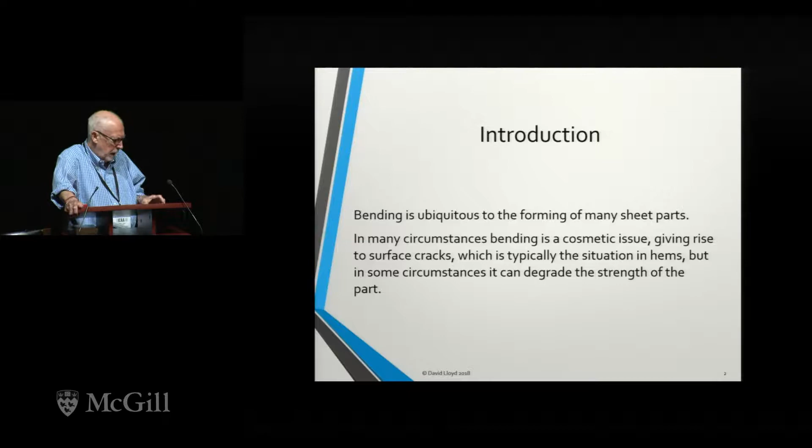So it's quite an important property that's sometimes underestimated, because you need to assess the performance in bending at quite an early stage in alloy development. There's nothing worse than spending a small fortune of time and money on an alloy development only to find out that at the end of the day, the combination of mechanical properties with bending just doesn't meet the requirements that you have. So it's something that really in alloy development you should look at very early on.

There are several different bend tests. I happen to like the cantilever beam bend test, but there are a whole range of them. They give slightly different answers, but in fact, if you compare them, they all scale the same. So whichever test you use, provided you do it correctly, there's no real issue.

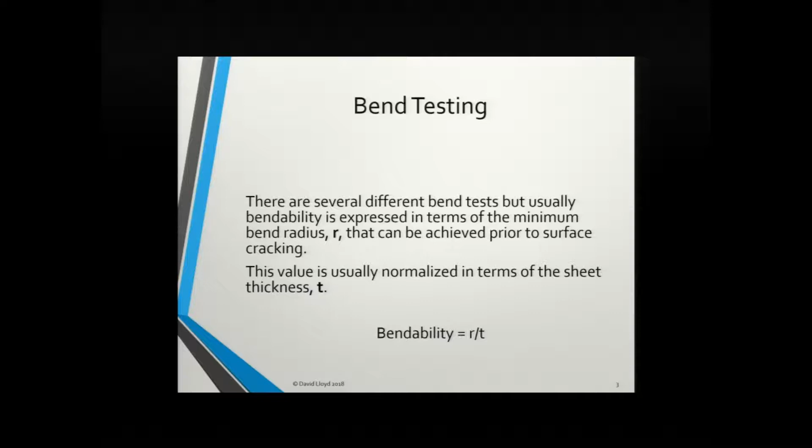And bendability is usually expressed in terms of R over T. I've said in this slide that the bend radius is normalized in terms of sheet thickness. It's not quite right, actually. It doesn't mean that if you measure equal values of R over T for a range of thicknesses, that you understand what's happening with different thicknesses of sheet. So normalization is not really the right term.

But we use R over T because, as you'll see later, it comes up in the equations of strain associated with bending. To understand bending, we need to consider really three issues—maybe more, but let's look at three anyway.

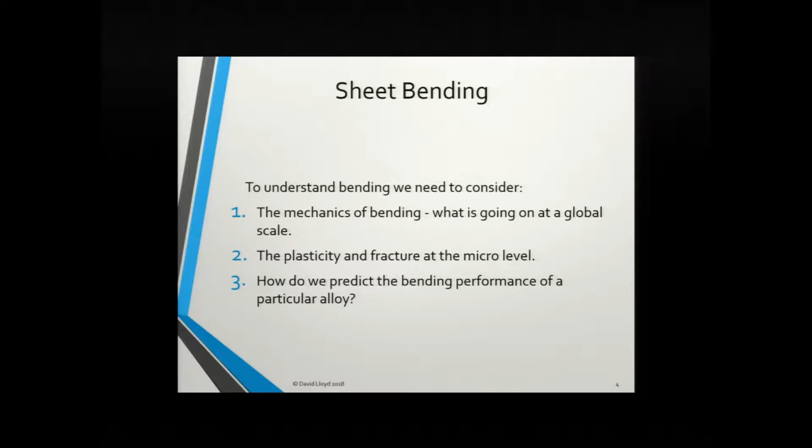There's the mechanics of bending—what's going on at a global scale in the bend test. Then there's the plasticity and fracture at the micro level. And then finally, we really would like to be able to predict what the bendability of any particular sheet is in a consistent fashion, so that one can compare alloys and materials.

The bending mechanics are really straightforward in principle. Essentially, if you bend the sheet, the outer surface, as you all know, is in tension. The inner surface of the bend is in compression. That means that somewhere in the thickness of the sheet, the strain goes from tension to compression, and there's actually a zero strain there, and that's the neutral axis.

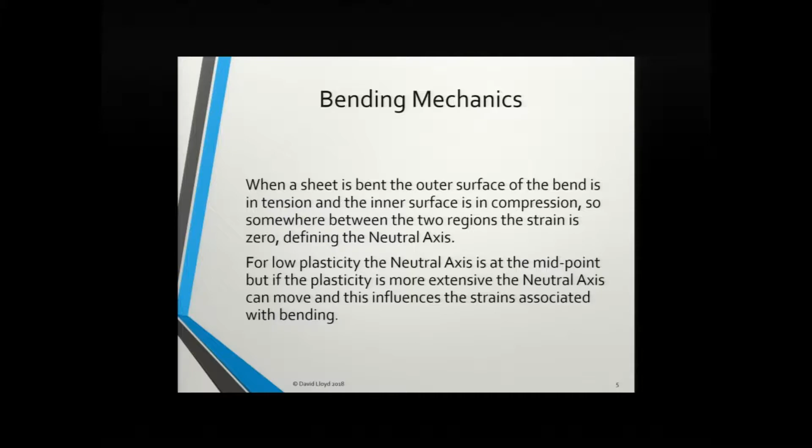For low plasticity alloys, the neutral axis is essentially at the midpoint. So if you're looking at really high-strength aluminum alloys, high-strength 7000s and 2000s, the neutral axis will sit round about the midpoint of the sheet. However, in automotive or transportation alloys, which is what I'm primarily going to talk about, there's a lot of plasticity, and as a result, the neutral axis moves.

And from many aspects, which I won't go into, we need to know where that neutral axis is and how it's moving. Now, the basic mechanics of bending were established in the 50s by Sachs and his group, and subsequent to that there were also various analyses. They're all fairly consistent.

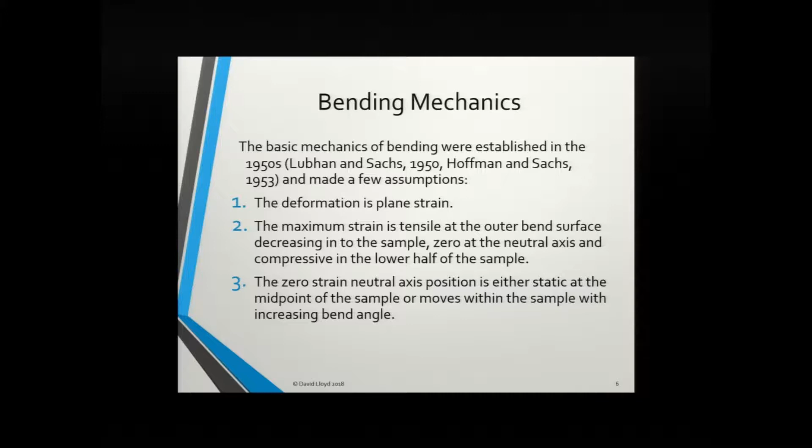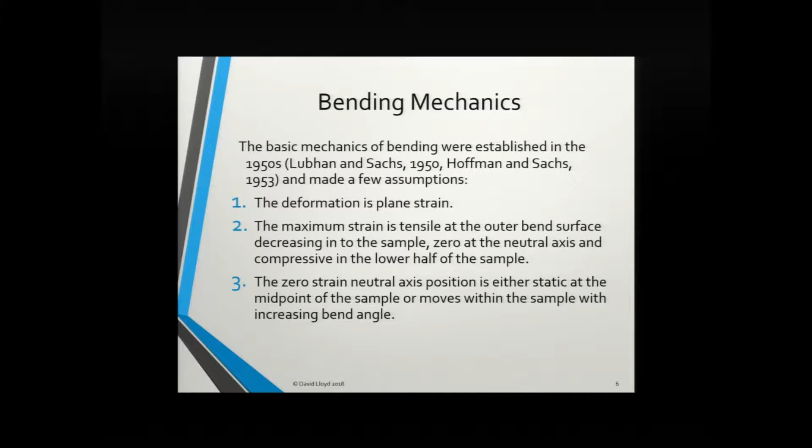The approach to the models that they used was to assume that deformation is in plane strain and bending of sheet. That's correct. They assume that the maximum strain is tensile on the outer surface, compression on the inner surface, and so we have a neutral axis, and the neutral axis can move or not depending on the alloy, as I said. So that's all pretty straightforward.

For a perfectly plastic sheet, which is what the mechanics models basically assume, the neutral axis radius is given by this equation. So it's a function of, as you'd expect, the radius of the bend and the thickness of the sheet.

For a moving neutral axis, the maximum strain is given by this equation. It's a tad more complicated, but essentially the parameters are the same.

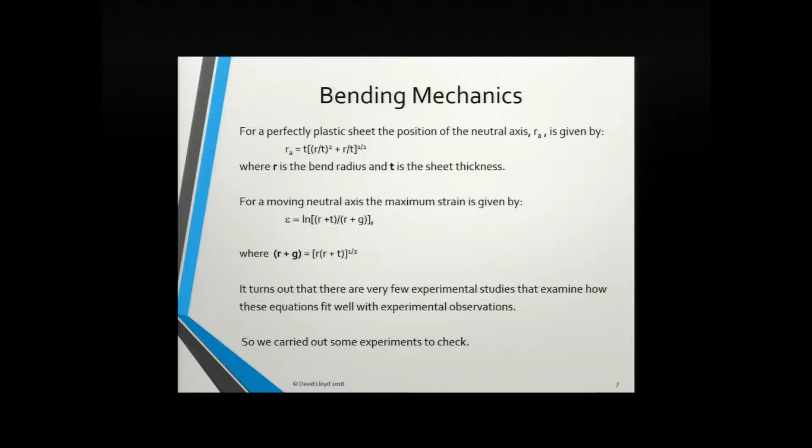It turns out, about 20 to 30 years ago when we started looking at this stuff, there were very few experiments that had actually looked at how well these equations performed, how close to experimental results they were. Since we were using these equations for a variety of things, I decided that we should actually check them out.

We found a paper by Brendan Parker in Australia at Monash about 20 years ago, where he'd used hardness measurements. He had shown that the neutral axis moved, but the technique had too low a resolution to be able to compare with experiments.

So we decided to do some experiments that would give us an idea of how these equations work. We've done experiments on a whole variety of alloys, but I'm just going to talk about experiments on 1 millimeter sheet of 6111.

It's in the T4 temper, and it was water quench sheet. The sheet was then electropolished, and we examined either the through thickness plane or the upper bend surface.

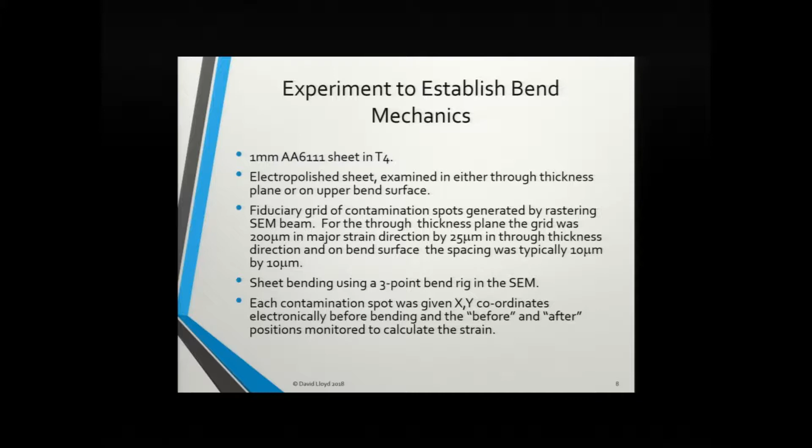What we did was lay down a grid of carbon contamination spots. We did it in the SEM by rastering the grid along and basically letting it dwell at various points, which gave us a grid of carbon contamination spots.

For the basic mechanics equations, we used a grid that was 200 microns in the major strain direction and 25 microns in the through thickness direction.

But for looking at the upper bend surface, which I was also interested in, in terms of the plasticity and damage there, we looked at a grid that was 10 by 10 or even 5 by 10.

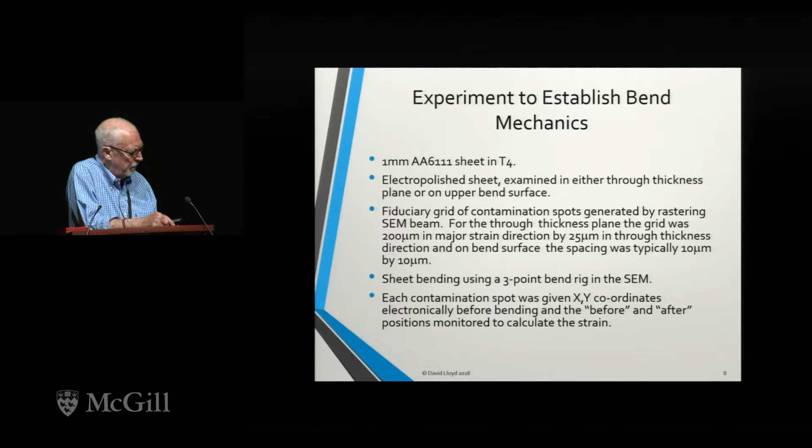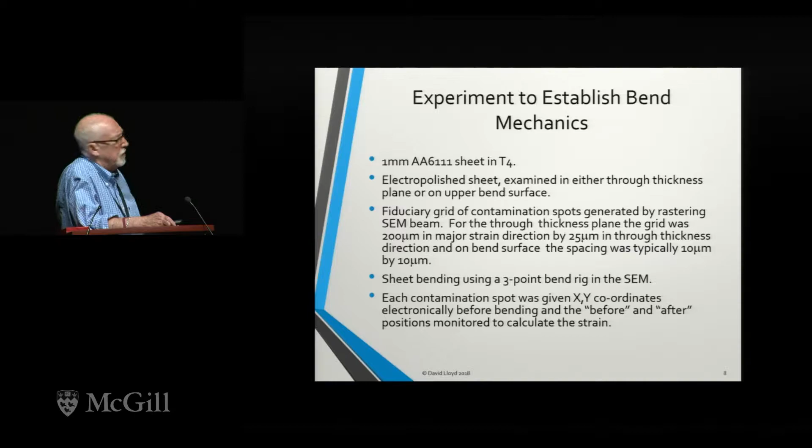The sheet bending was done inside the SEM, using an automated 3-point bending rig. Each contamination spot was electronically given XY coordinates, so that allows us to know where the spots were before and after bending, and we could back out the strain.

This is the bending rig, inside the microscope. This is the bend sample. We can bend it in a controlled fashion, and we used a camera shooting through a port on the SEM rig. We could measure the bend angle and photograph the macroscopic bend sample, so we could back out the radius of the bend and so on.

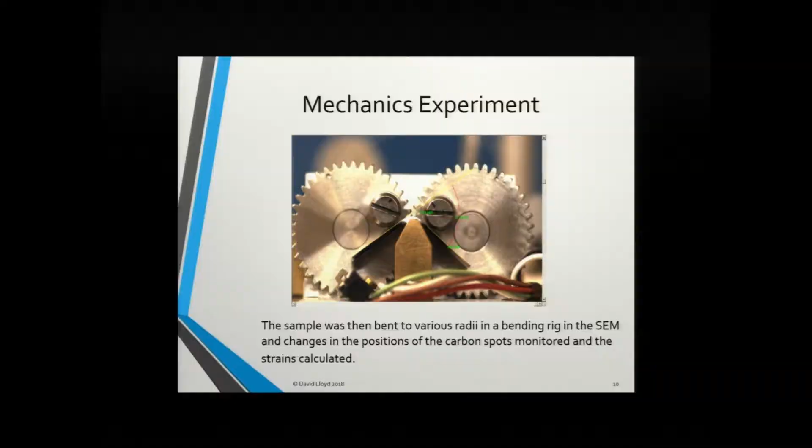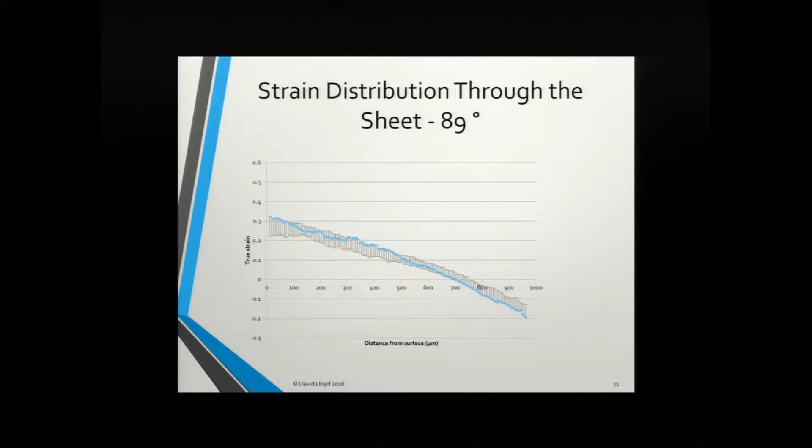This distance gives you the position of the neutral axis from the surface.

These are the upper and lower limits of the strain measurements that were made. These are not multiple samples, it's a single sample. What we're basically doing is concentrating around the apex of the bend and moving either side of that to get the range of strains. You can see the scatter is on the order of a strain of about 0.1 when you're close to the surface, and it tends to generally decrease as you go through into the bulk of the sample.

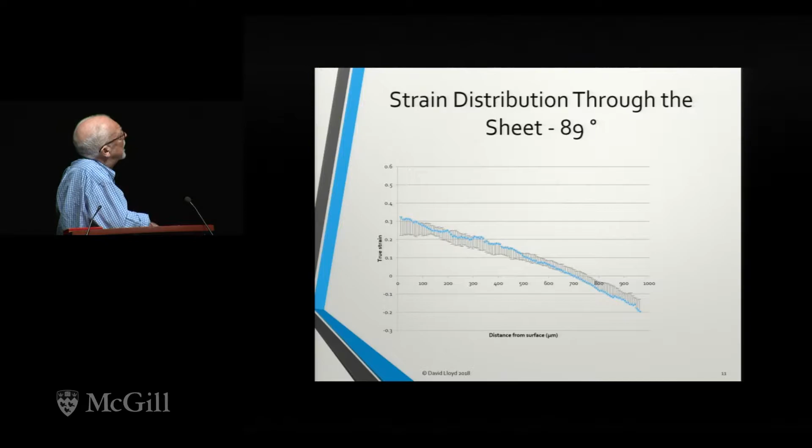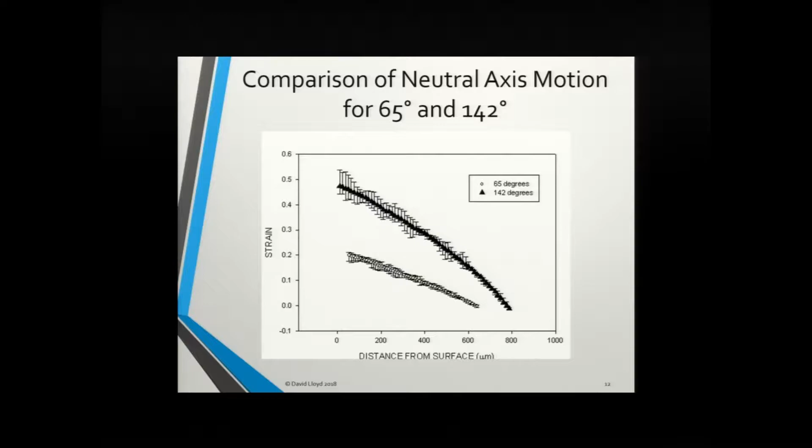So the neutral axis is moving, and from comparison of a large amount of different tests and data, the movement is pretty consistent. That's a comforting thing.

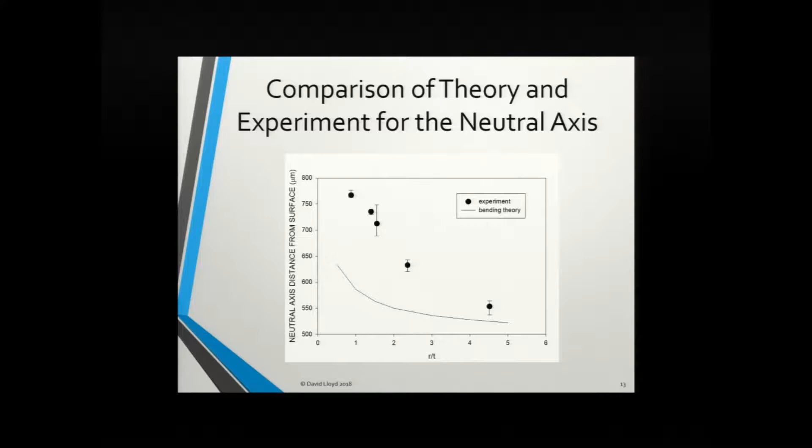So we can compare this movement with what the theory tells you, and that's what's done here. This is what the theory tells you, and these are the measurements we got. The theory underestimates quite significantly the level of neutral axis motion.

That's pretty well consistent with the 6000 series alloys we've looked at: 6016, 6010, 6111. They all show this fairly large difference between what the theory is telling you and what the actual degree of bending is telling you.

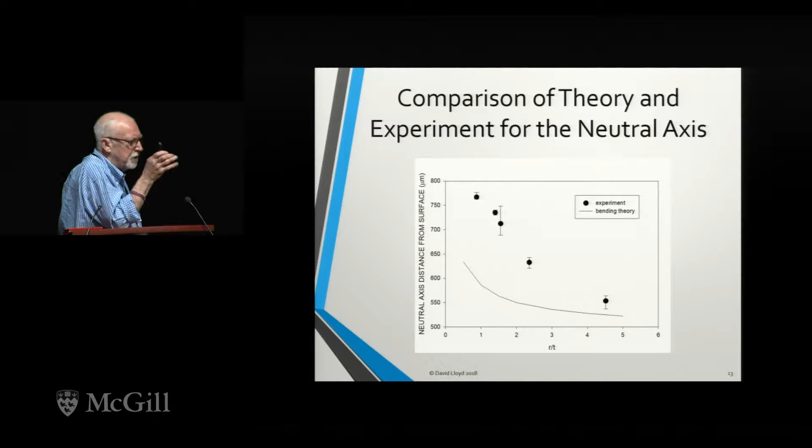This is not surprising when you look at how the analysis was done. I'm not going to go into how the basic mechanics analysis was done, but it's a fairly consistent trend that you get. So if you're interested in modeling issues through the thickness of this material, it's rather useful to know where this neutral axis is, depending on the radius of the bend you make.

And it's not a trivial amount of error or difference.

The other thing we want to know is what is the maximum strain at the surface of the sample, and how does that compare with theory? For that, we measured the maximum strain 10 microns below the surface, and this is what that data tells you.

Again, the theory is a bit off from the experimental data. The experimental data tends to be above the theory, but the difference is probably pretty minor. I normally don't worry about that difference, so we've been quite comfortable using the theoretical mechanics equation for estimating the surface strains. But you can see that the theory does underestimate what the surface strain is.

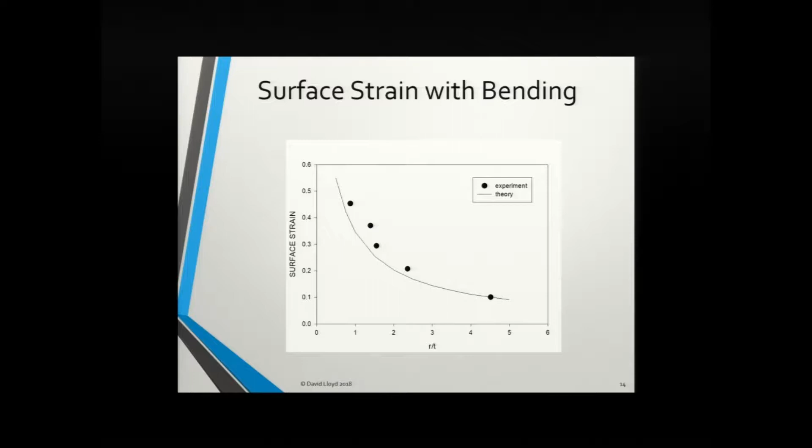You can see that in this particular case, we're looking at a surface strain, that's a global macroscopic surface strain of about 0.45, that sort of order, in this particular case.

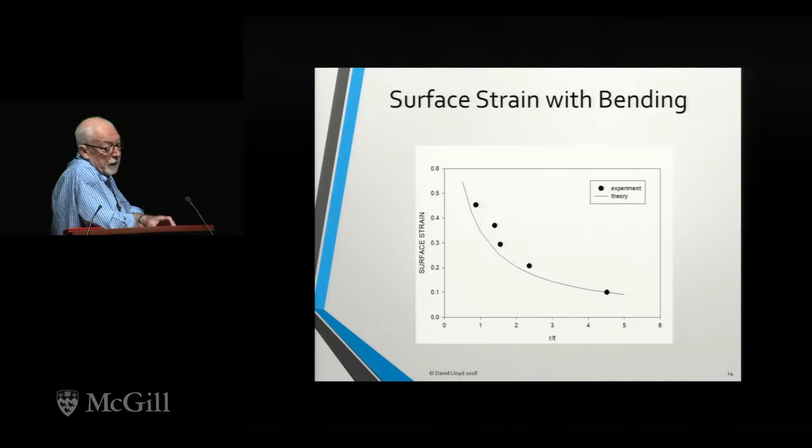So what conclusions can we make from the bending mechanics then? The motion of the neutral axis is significantly underestimated by the theory, and that's important under certain circumstances. For what we're talking about today, it isn't, but it's important to bear this in mind if you want to compare damage models and so on.

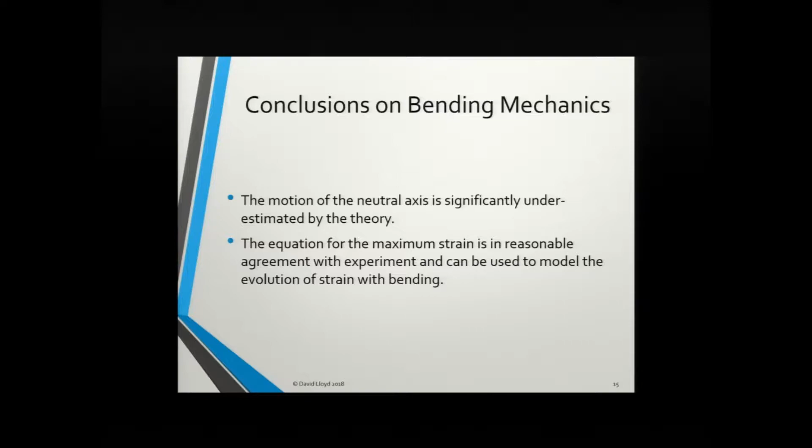And it's important if you're looking at graded structures. In other words, if you're looking at variation in grain size through the thickness, or a variation in particle content through the thickness, or sandwich panels, it's important to appreciate where that neutral axis is and where it's going as you're bending it.

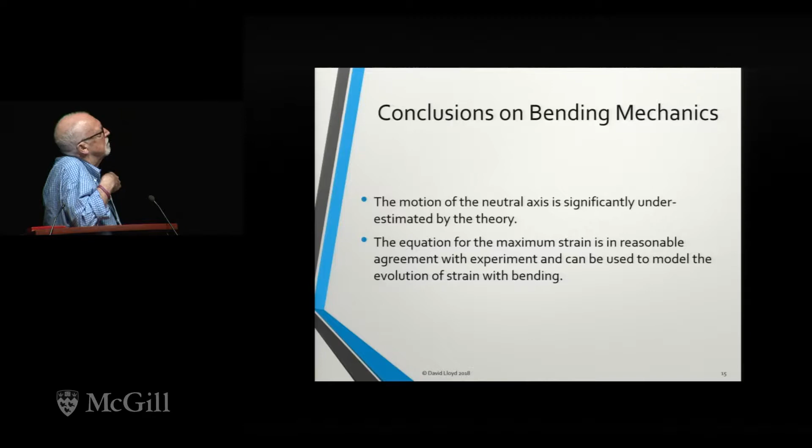Because the damage essentially is progressing quite significantly deeper and deeper into the sample. The equation for maximum strain, I think, is in reasonable agreement with the experiments and the variations of results that you get, so I think that's okay.

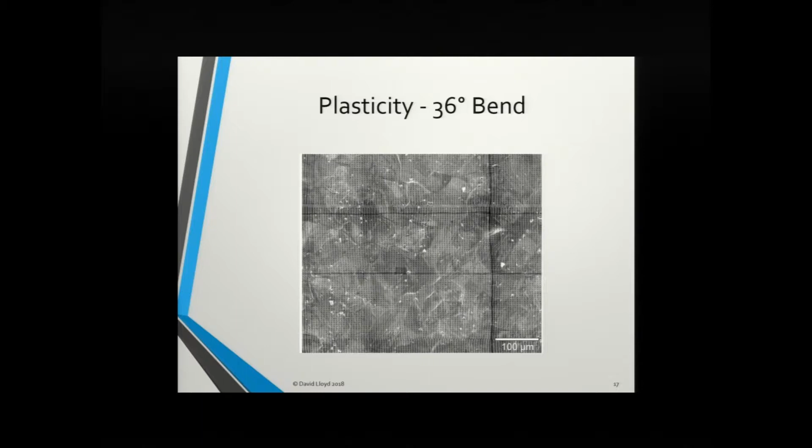Remember now, we've got an upper bend surface. Essentially, the grains of the surface are totally unconstrained, and they displace. It's not an insignificant displacement, and I'll show you in a minute.

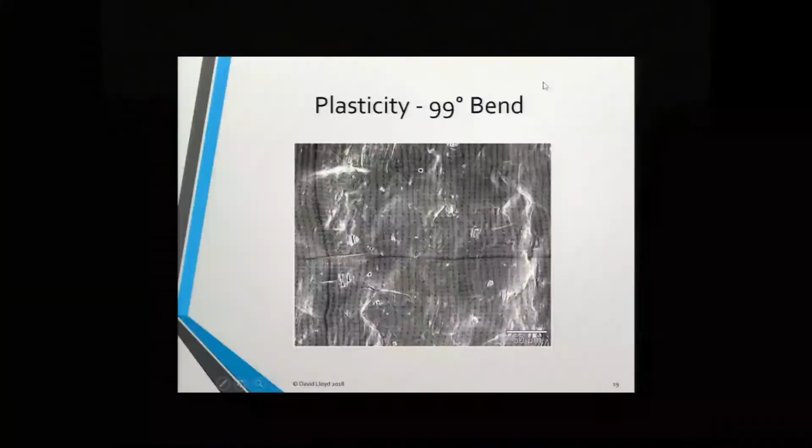And we know that the susceptibility to plasticity localization is higher in the plane strain condition. This shows the 99-degree, same bend angle, but a rather higher magnification. And here's our grain boundaries with a displacement.

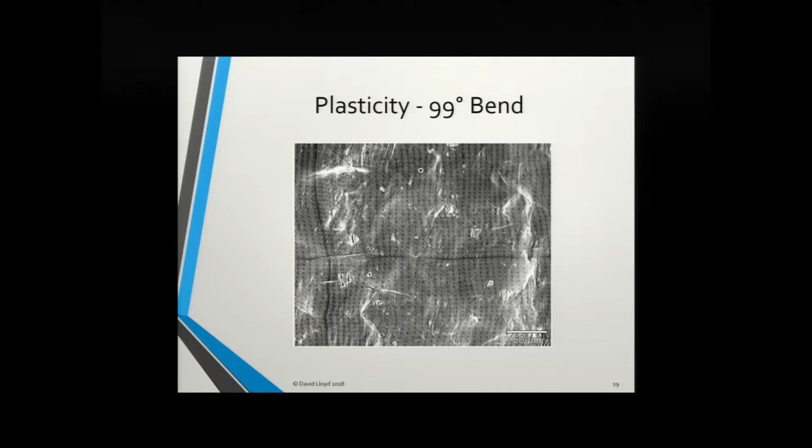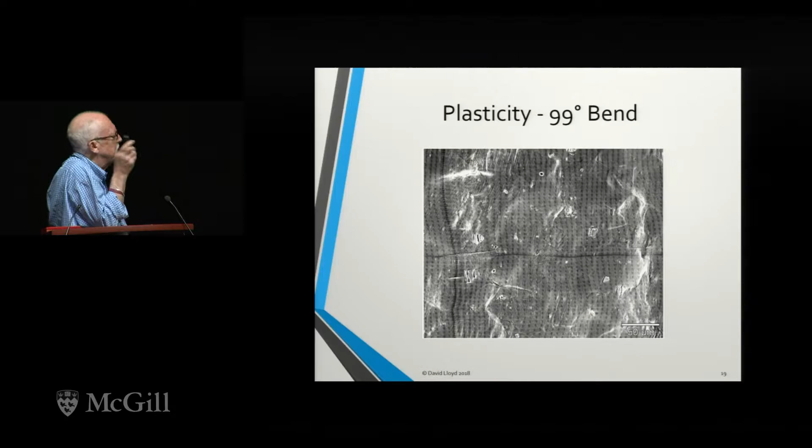And these are intermetallic particles on the surface that at this bend angle have cracked. Now, the interesting thing about this technique is that you can monitor the development of strain around those intermetallic particles as the bending continues and as the damage continues. So it's quite useful, there's a lot of information here which I'm not going to go into, but it is quite interesting to look at how the local strains evolve around constituent particles, how important the size of the particle is, and also the shape.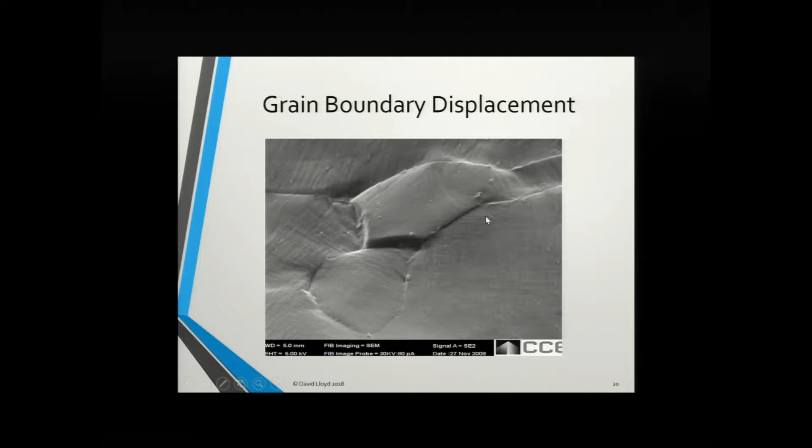Experiments like this are really quite interesting, and maybe if you do them, you'll find some things that might surprise you a bit. This is a FIB image, again at a 55-degree angle, and oh boy, a pointer has suddenly come back. How do we do that?

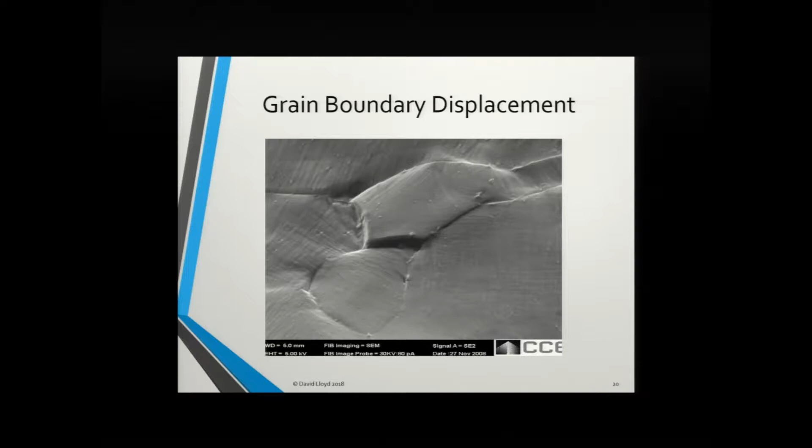This is a displacement at the grain boundaries, and you can see the slip lines going on inside the grains. Some of these displacements are really quite sharp, and if you look at them at higher magnifications along this displaced surface, you'll actually see evidence of slip lines there as well. So as this grain is doing that, general plasticity is also occurring in the grains.

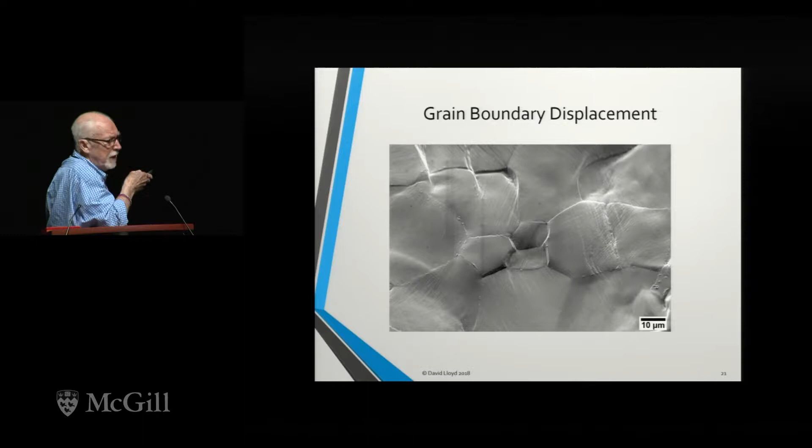Oh, this is another FIB image at a different mag, and here is this grain boundary displacement. This is really significant displacement.

Now, you do see it in tensile samples, and Tony Rollett has done some work on this in tensile samples. We saw it first in significant amount when Mukesh Jain and I were doing hydraulic bulge tests, and we saw these displacements. It's all a result of the fact that these grains are unconstrained, and the strains involved in bending locally can be really quite high.

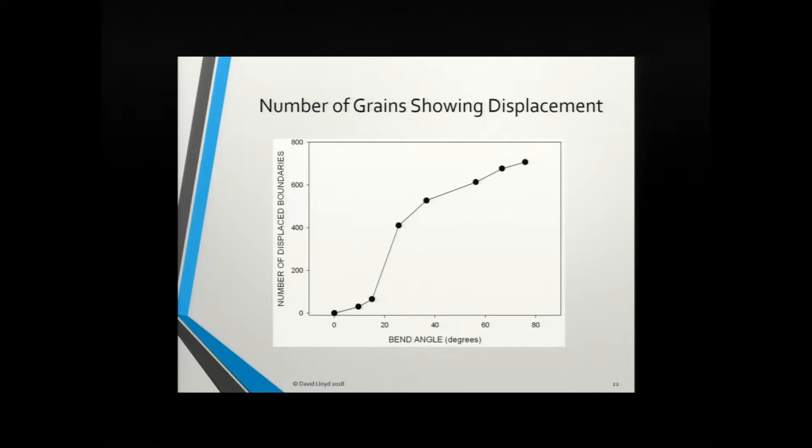The number of grains showing displacement with bend angle follows this trend, and you can see that the displacement starts from really pretty low bend angles, then increases very significantly, and then levels off. The number of grains increase, but also the displacement at the boundaries, on the individual boundaries, increases fairly drastically.

Obviously a deformation, not too surprising, it is incredibly inhomogeneous. As you continue the bending, the local strains on the boundaries and within some of the grain features, the slip lines inside the grain, increase. But the strain also spreads along the boundaries. So the number of boundaries showing displacement increases as you continue bending, the strain locally associated with the boundaries increases, and it spreads significantly along the grain boundary.

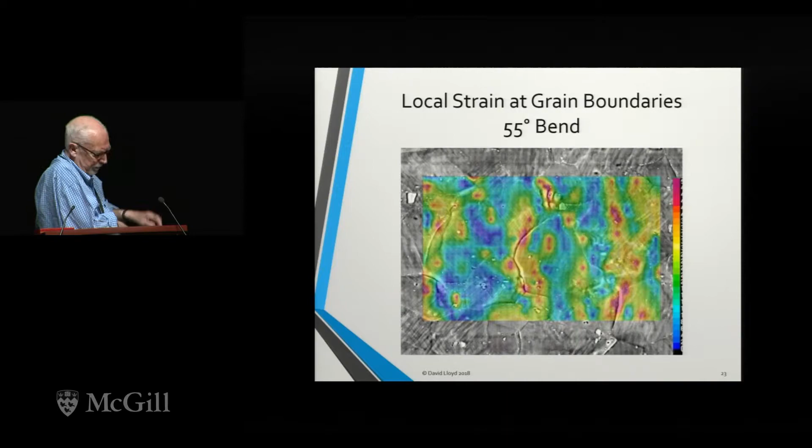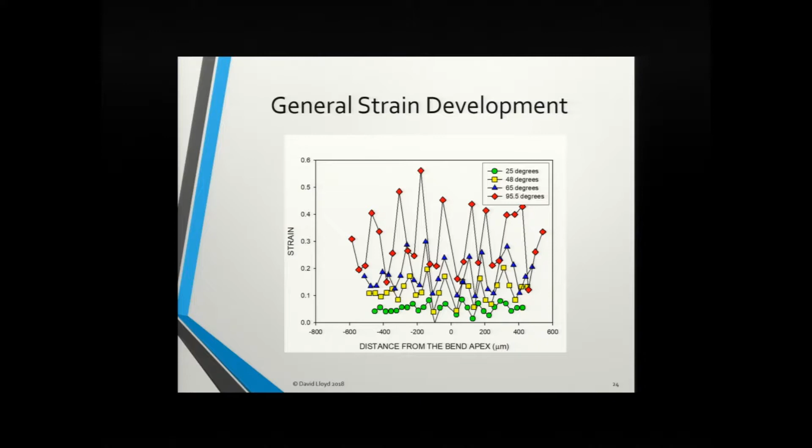This is looking at the distribution now at a range of bend angles, covering exactly the same region in the sample. Here's the sample, with measurements made at a bend angle of 25 degrees, which is very, very low, then going up to 48 degrees, up to 65 degrees, and so on, eventually up to 95 degrees. Now, this sample is not broken, nowhere near broken, but you can see that the strains are already getting pretty high locally.

In fact, they'll actually get up here on this sort of scale, up to 0.7 or so, typically. The other thing that strikes you is that localization actually starts fairly early on. Here's an example where we've got this region where there's a localized strain, and then essentially it grows and grows.

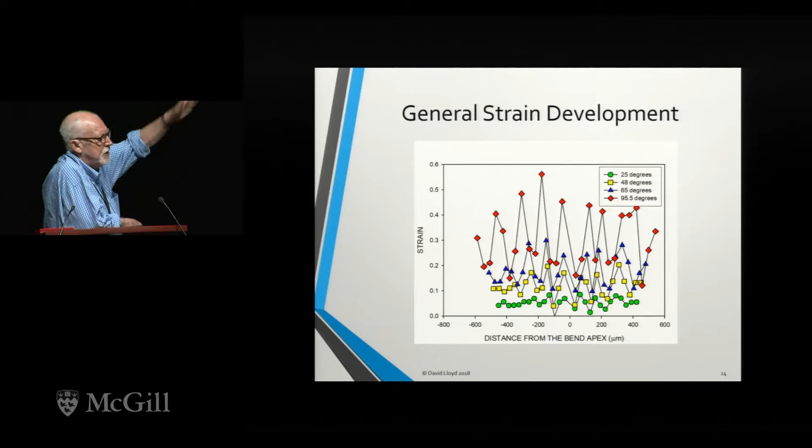It goes up to there, and then when you continue bending, it goes even higher. So localization starts very early on. And this is not differentiating whether I'm at a boundary or anywhere else, really. We're looking across a region of about 600 microns either side of the bend apex, which is at the 0 point.

So the deformation localizes early and concentrates early. Once you've developed a high local strain area, that will continue to evolve through the subsequent bending process and will carry on. Eventually, the damage will link up: boundaries, intermetallic particle voiding, cracking, and you'll develop these fractures on the surface of the sample, and you're dead.

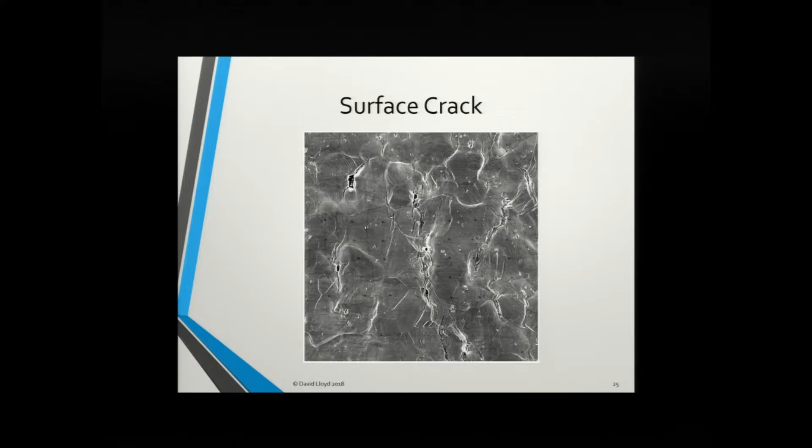You can look at the damage process with this technique using the grid carbon spots and grid. You can see how this damage links and how it connects up to give you final failure.

So the general comments then, just to recap: the strain is very inhomogeneous, not surprising, localizing, begins at relatively low bend angles, and the surface displacement at grain boundaries also comes in at relatively low bend angles. The number of grains showing the boundary displacement increases with bending, as does the extent of the displacement at any particular boundary. Other damage mechanisms occur at higher bend angles.

You'll get localization in surface shear bands. That's a function of the alloy and a bunch of things. Cracking of intermetallics, voiding, and the usual fracture processes that we're all familiar with. And eventually it all links up, and that's that.

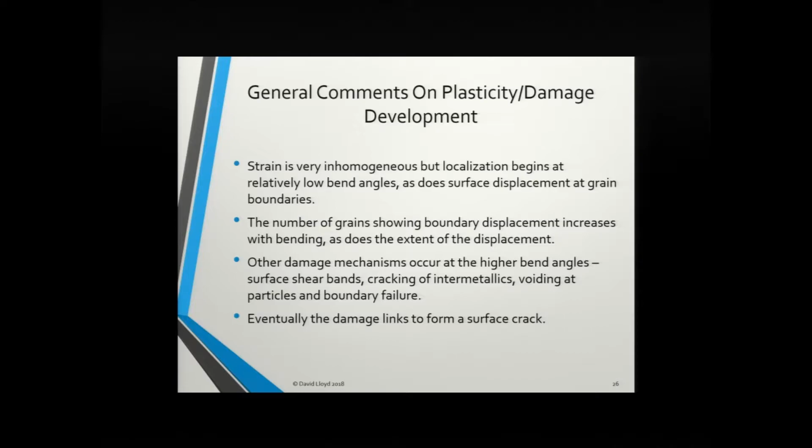Okay, so we've now looked at the mechanics, so we now know what sort of strains we are looking at, where those strains are, and we can relate that back to the microstructure of the alloy. We would like to be able to predict bendability.

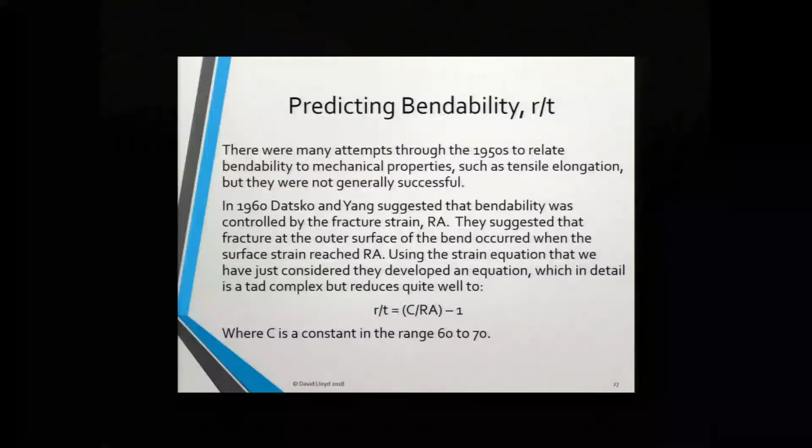There were a lot of attempts through the 50s and whatever to predict bendability, but Datsko and Yang in 1960 suggested that bendability was controlled by the fracture strain of the material, and once the strain at the bend surface reached that fracture strain, you get cracking, and that would allow you then to develop an equation to predict it.

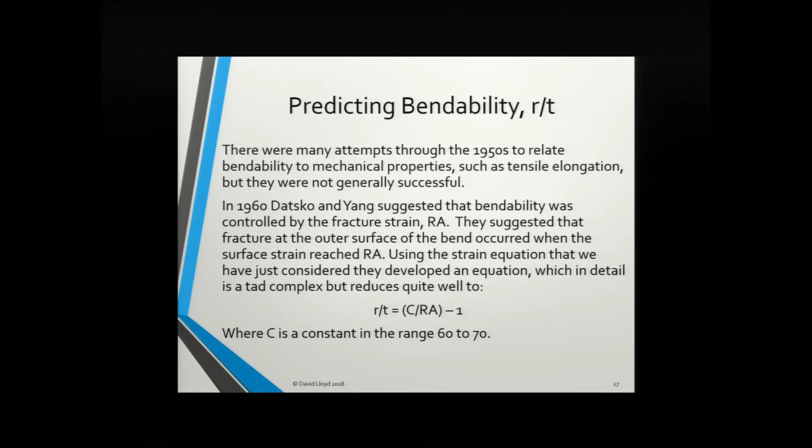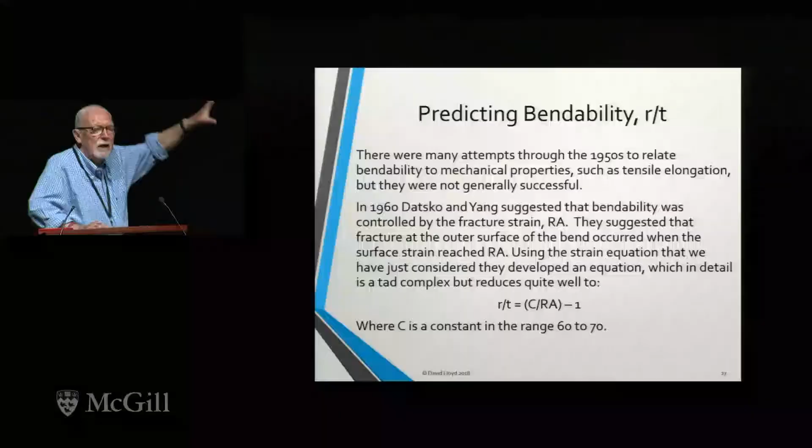They used the Sachs equation in their paper, which if you can get hold of, looks at a static neutral axis and a moving neutral axis, and the form of the equation for both is exactly the same. It's of this sort of form, which is really very simple. In fact, if you actually look at the paper, the analysis is a tad more complicated than that, but that empirical equation actually is really very close to the theoretical expression that they developed.

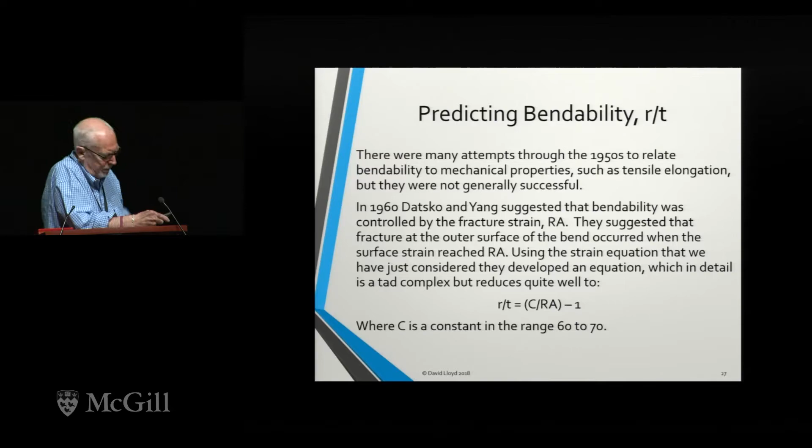So there's this very simple equation. This is the bend radius that you can get where cracking occurs. This is the thickness, this is the fracture strain, and this is a constant. And that constant for a moving neutral axis is in the range 60 to 70, at least in the aluminum alloys that we've looked at. So it's 60 to 70.

If you don't have a moving axis, this equation still applies, but C is now down—they suggested 50. The experiments that we've done on high strength 2000 series alloys suggest that it's closer to 40. But anyway...

That equation can be used, and we've shown a variety of data plots of this in the literature over the years. Strictly, the fracture strain should be measured in plane strain, of course, because that's our deformation mode. But Embury and the group down there, and also Lewandowski and others, have shown that for aluminum alloys of the types we're looking at, the path dependence of the fracture strain is relatively small when you move from measuring it at the tensile path as against the plane strain path.

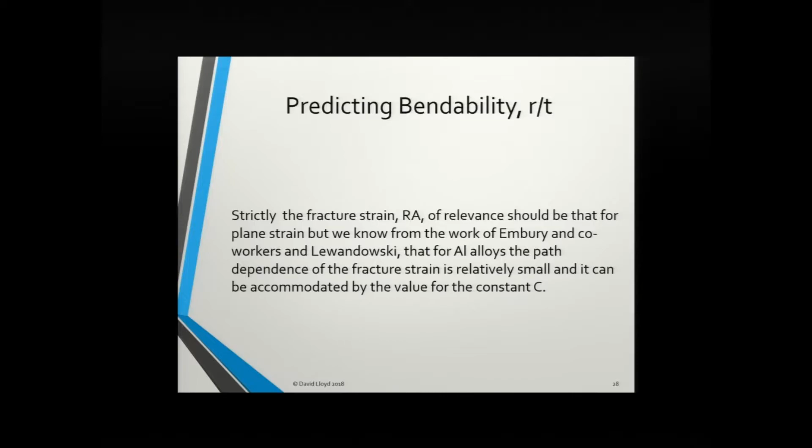Remember, we're looking at fracture. We're not looking at the normal FLD minimum behavior that you see at the plane strain position. In fact, the minimum fracture strain is actually at the biaxial position, right? Anyway, there isn't much difference. You can, and we have, measured the fracture strain in plane strain, which is a tedious exercise, but you can do it. And you'll find that the difference is within 3 or 4%. So with the scatter you've got in a normal experiment, I forget about that.

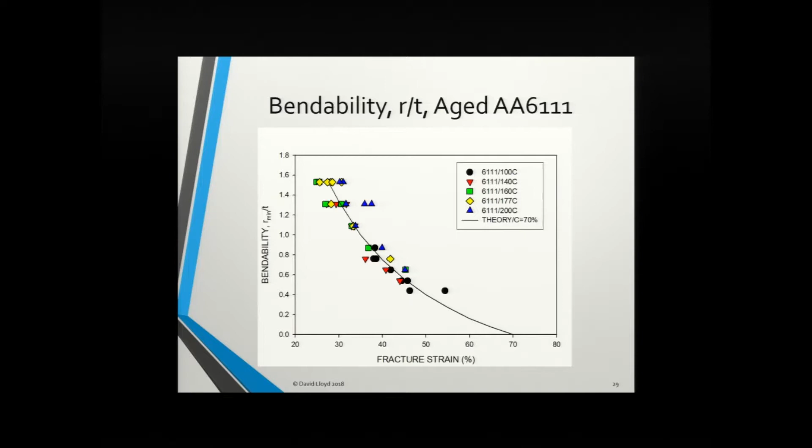And we find for 6111, 6016, and alloys around that thing, process as we do it, 70 is what works for us. So that's the value that we use.

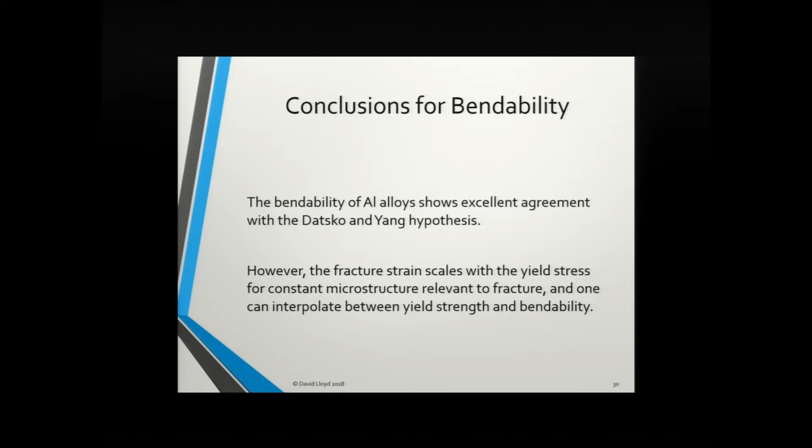So the conclusions for bendability are the bendability of aluminum alloys, and it's not just sixes, incidentally. We haven't looked at an aluminum alloy that hasn't given agreement with that expression. And it's reasonable, right? Essentially, if you achieve a strain at the bend surface that's equivalent to the fracture strain, the material's going to fail. That's the way it is.

And we now know from the equations that we showed and the data we showed previously, if you have a profile and you know what the radius of that profile is, and if you know what the fracture strain of the alloy is, you know whether that sheet is going to meet those bending requirements or not. It's really pretty straightforward, really.

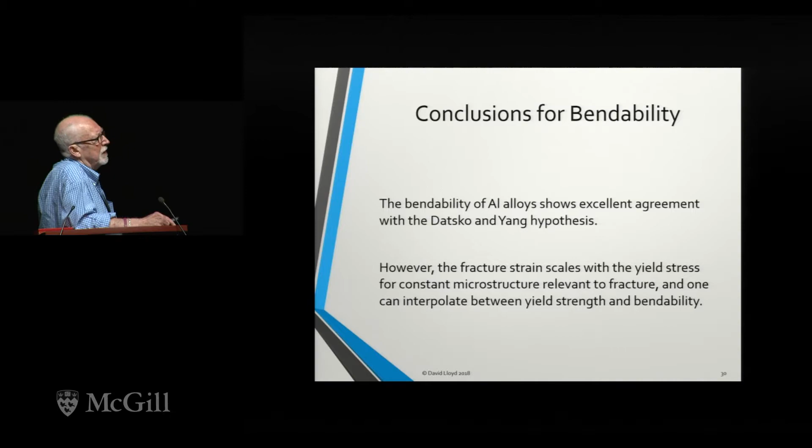Now, in addition to that, the fracture strain scales with the yield stress of the material for a constant microstructure relevant to the fracture process. And by that I mean it's not the general microstructure, it's what bits of that microstructure are relevant to the fracture process. And if you change the strength while keeping those parameters in the microstructure constant, the fracture strain will scale with that.

And that's rather useful, because that means then that you can, in doing alloy development and looking at different alloys, if you know what that scaling is, then you don't have to keep doing bend tests or whatever. You can just interpolate between what the yield stress is doing with a particular treatment or alloy and essentially estimate quite well what the bendability is going to do.

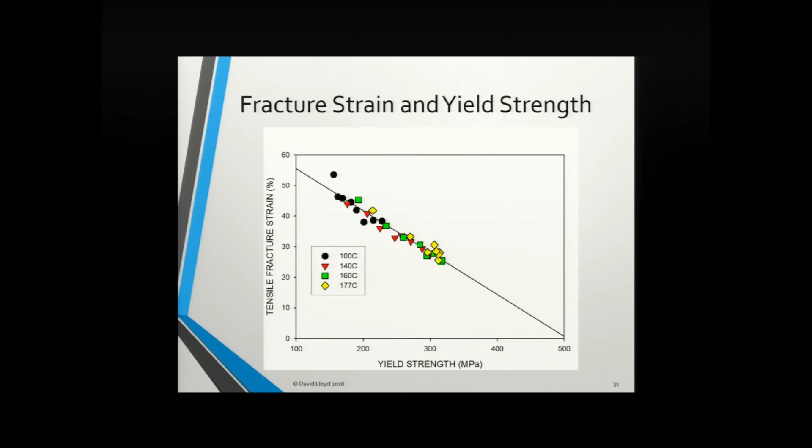That data point there, it's not an outlier, it's for very short aging times at 100 degrees C. And it's in a transition point between artificially aged, and this is very lightly artificially aged, and naturally aged material. And the scaling line for naturally aged material is different to that for aged material. I'm not going to go into this, whatever, but that's the way it is. So that data point is actually correct, but there'd be another line coming down here that was a natural aging. If we had natural aging data, it would track on a different scaling line.

Okay, so we've covered the mechanics of bending, the nature of the plasticity, and how to predict bendability. And I think we can do that all fairly well in a self-consistent fashion. The plasticity associated with grain boundaries is more apparent on a bending surface than it is generally, and the strains locally at grain boundaries can be very, very high. And that's a result of the unconstrained deformation of the surface.

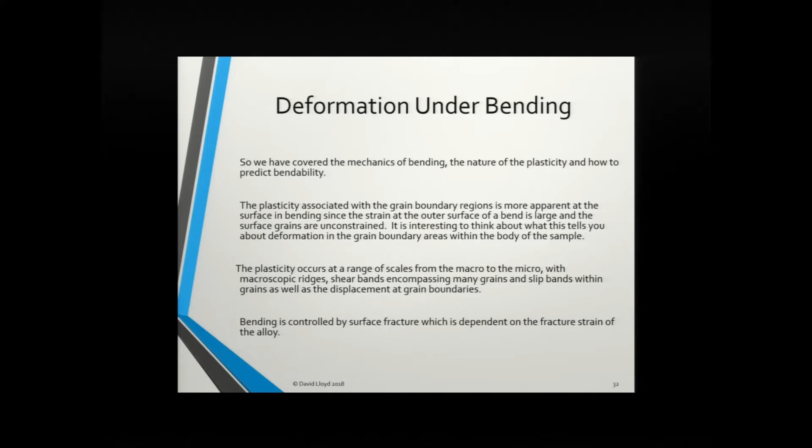It's interesting to think about essentially what does that displacement and strain associated with it tell you about what's happening to the deformation in the grain boundary area within the body of the sample. And you might want to think about that a bit.

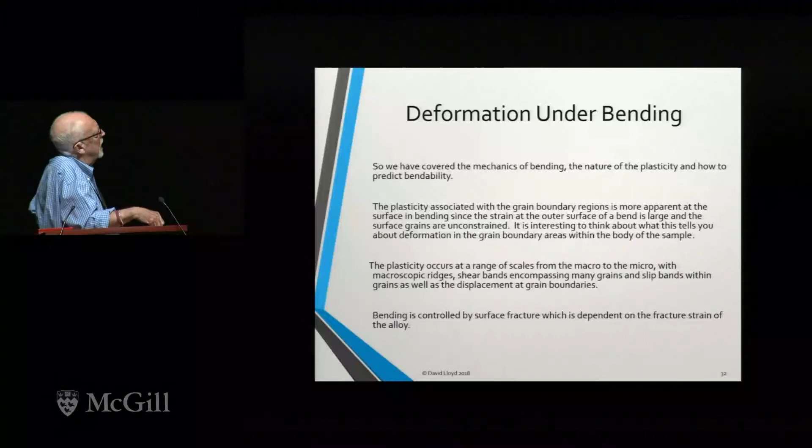Plasticity occurs at a range of scales from macro to micro, as you'd expect, and you generate. There's a whole range of topography issues that I haven't even touched here, which is associated on a large scale on the bend surface. You'll see ridges and so on. But they don't appear to significantly affect anything that I've spoken about. They're interesting, and they could have a cosmetic effect in certain circumstances, if you do something stupid like having a huge grain size in the alloy.

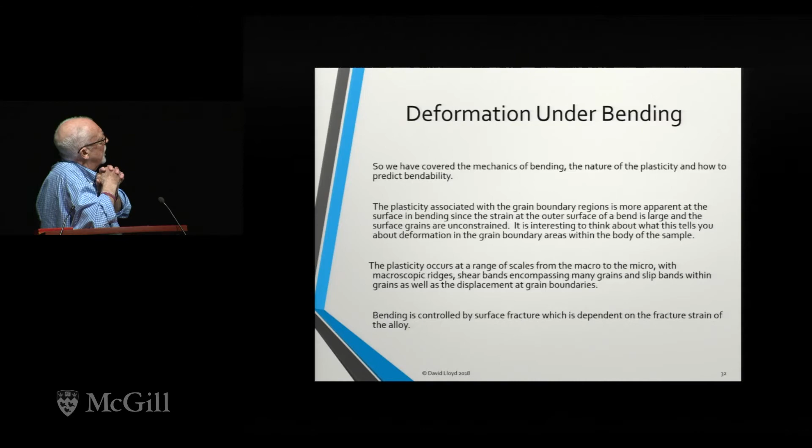Bending is controlled by surface fracture, and that's dependent essentially on the fracture strain of the alloy. So if you know what the R over T of the particular profile that you've got, you can then back out from that what the strain associated with that surface is.

If you know what the fracture strain of the alloy is, and you have plots as we've shown, you can immediately say whether that alloy is going to meet that bending profile or not. Now, there are issues in terms of sometimes we don't just bend a sample right off the bat—it goes through strain paths and so on, and that's another talk. But essentially, for an initial assessment of how the alloy is going to do, I think if you use these sorts of approaches, you can estimate very well how the alloy is going to perform in a bending test.

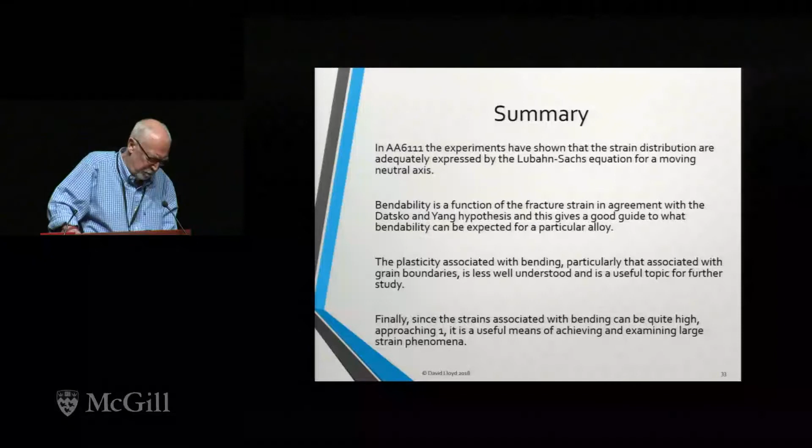The equations are particularly useful in terms of neutral axis issues, movement of that in graded microstructures—some of the things Nick was talking about, which come up in a couple of other papers at this conference. The neutral axis's motion can have significant influence on the overall bend behavior of the alloy, and it's useful to know what it's actually doing.

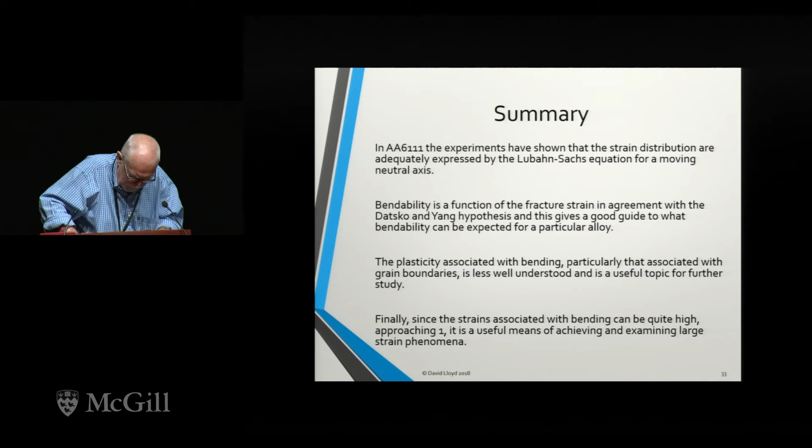Anyway, that essentially is as much as I'm going to take of your time. I'd like to thank Mark Gartno and the Serco guys for helping me with some of this stuff, and the numerous students that have toiled through making these strain measurements—it looks pretty simple when you see it in a graph, but when you actually go through it, it's a hell of a lot of work. We've had, over the years, students from Waterloo, UBC, and McMaster, not all metallurgy students either, who've done a super job generating a huge amount of data. So thank you for listening, I appreciate it.

Just one or two, okay. Not that I know anymore. David is willing to answer a few questions if there are any in the audience. Christoph, yes? Oh, if I'm mobile, maybe, yeah. No.

Thank you, that was good, yeah. Oh, Warren, sorry, Warren. Oh, sorry, David, thank you for the talk. Have you looked at different quench rates and PFZs and how they affect surface displacement?

We've looked at different quench rates, and as you'd expect, quenching fast is always good. But no, we haven't looked at PFZs and so on. You know, the bend test is really informative in terms of if you have the microstructural tools associated that we now have to look at these bend samples.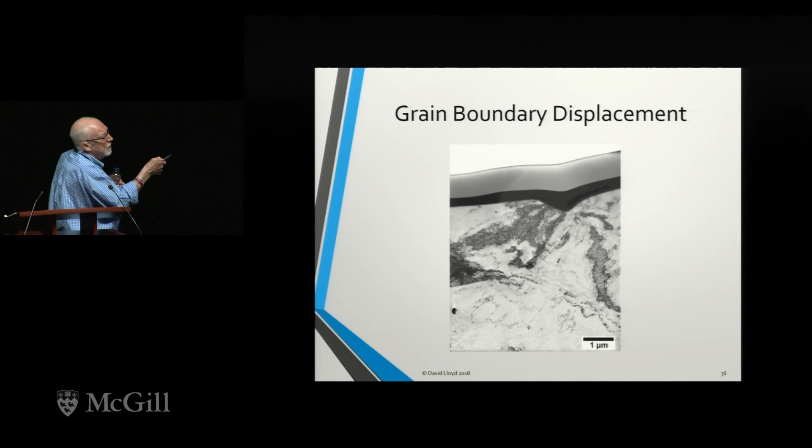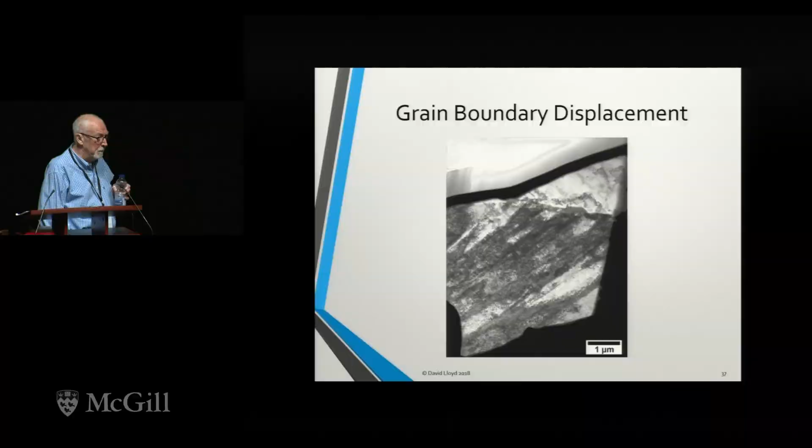So that's what we're looking at here. This is the bend surface, grain boundaries here, and here you can see the displacement that you've got associated with it. Those sorts of experiments are really very interesting. This is 6111, and again, there's that bend surface and the displacement you've got and how that plasticity goes on. These are not trivial strains—you can get grain boundary strains in 6111 that are 0.9. So these are not trivial strains, but it's a very useful tool to look at things like damage and fracture, basically by using the bend test as a means to look at these features.

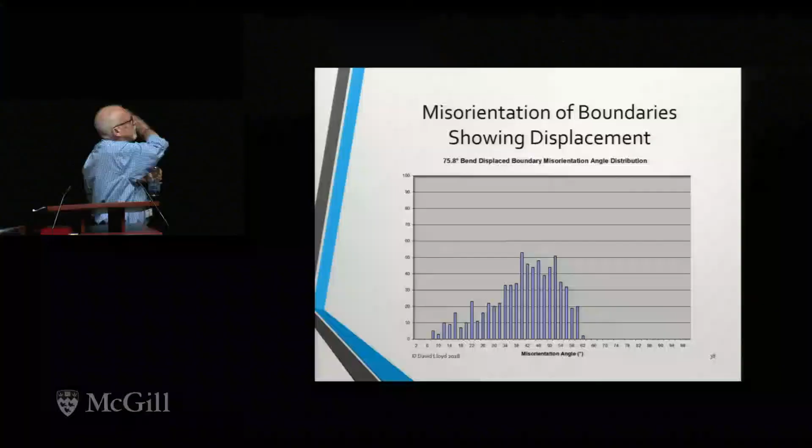And then you can do the misorientations across the boundary. What you find is that the boundary misorientation is totally irrelevant to what you see—there are no special boundaries there that are giving rise to this. And Tony Rollett essentially on tensile samples with much lower strains and lower extents and found essentially the same thing.

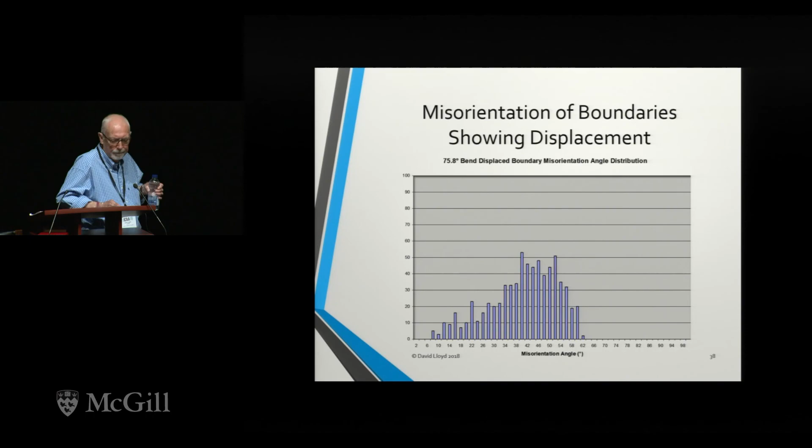Anyway, okay, I have to sit down now, okay, all right folks. That's okay, I'm sorry. That's okay. Do you want to sit up here for a bit, or do you want us to have? No, I can get down there, okay, great. You're helping, Matthew. I'm with you, thank you, Matthew.